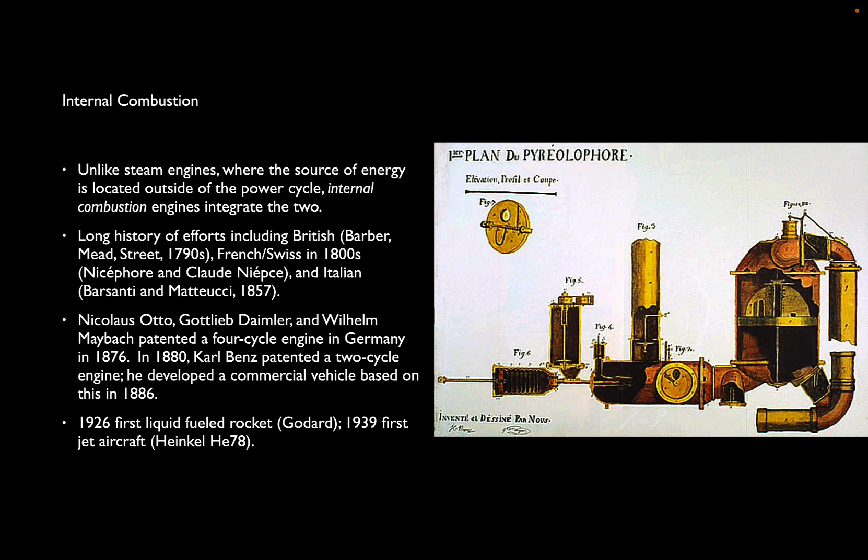This goes back to the 1790s or so in Great Britain, and throughout the early 19th century, there are efforts to create better and better engines, better power sources. In the 1860s and 1870s, a series of experiments in Germany, particularly by Otto, Daimler, and Maybach, start to produce workable internal combustion engines that can be mounted to smaller and smaller vehicles.

There have been efforts to put steam engines onto what had formerly been horse carts. Those are ungainly. They require an awful lot of effort to tend the fire. The internal combustion engine seems to offer a better way to do this, in that it can be self-contained. The driver doesn't have to worry about stoking the fire.

By 1886, Karl Benz has produced vehicles like the replica you see here, a commercially viable three-wheeled cart in this case that has a small internal combustion motor on the back that drives the wheels and allows it to move. There are other internal combustion technologies, some of which we'll look at a little bit later.

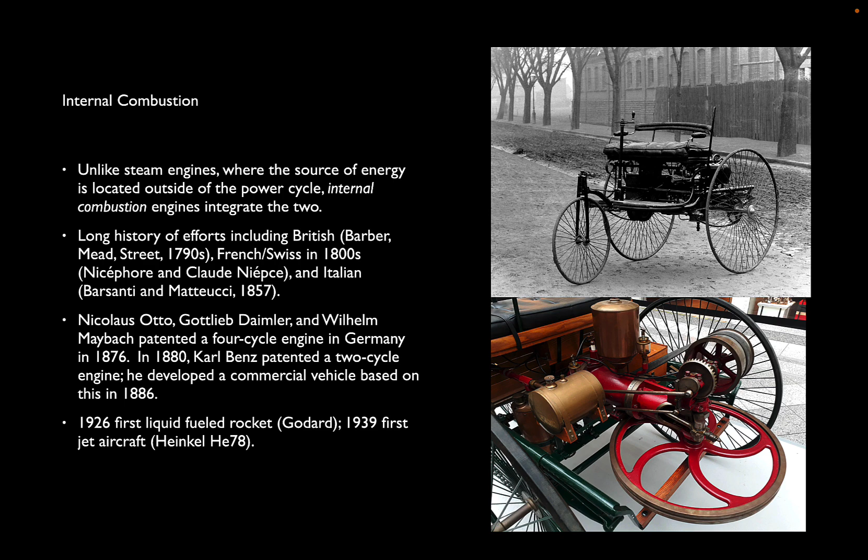Rocketry is internal combustion. Goddard in the United States pioneers that in 1926. And aircraft, both first internal combustion piston engine aircraft, but by 1939 the first jets are being used or experimented with in Germany. So the first thing I want to look at is how building responds to the popularity of internal combustion.

Benz and later Daimler and Maybach, and then eventually Studebaker and Ford in the United States, pioneer the commercial production of automobiles with internal combustion engines attached. They're complicated machines. They require a good deal of standardization and a good deal of assembly. One of the first ways that architecture or building responds to this new technology is by providing buildings that actually allow for the manufacture of these machines, of the engines and of the cars.

And there's a kind of one-to-one link between some of the building technologies that we've looked at and the automotive technologies that are coming off of the assembly line.

Kahn took a very standardized, Taylorized approach. He was a big believer in scientific management. Among his other achievements was the way his office was structured, very much like offices would be throughout the 20th century. Kahn was an early pioneer in this kind of brigade system of office hierarchy.

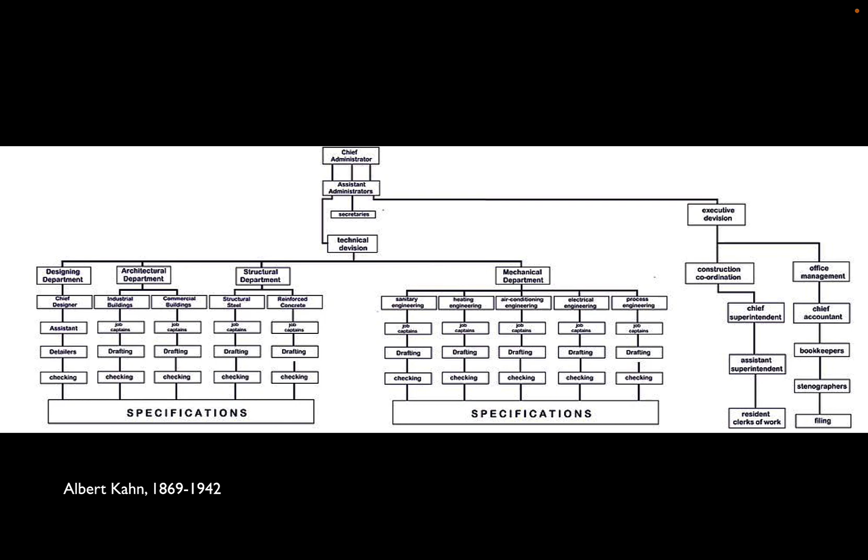Each complex project would get broken out into structural, mechanical, architectural, and what he called design, all reporting to a series of heads who would then report to administrators within the firm. There was also a division for running the office and coordinating construction. Kahn and his brother Julius Kahn were not only architects and engineers, but also inventors.

Julius in particular pioneered a type of reinforcing bar, and we've seen lots of patents for reinforcing bars. This is the so-called Kahn bar on the upper left. They developed a company that Julius runs, which ends up becoming independent of the architecture firm, called Truscon.

They produce the materials that go into a lot of the factory buildings, especially those the Albert Kahn firm designs. The Kahn bar combines shear reinforcement with tensile reinforcement, so Kahn sells it as a way to turn a reinforced concrete slab or beam into a truss with some of the same efficiencies.

But Kahn does other things as well. They pioneer the use of lightweight metal arches to provide for jack arch construction, but this time out of concrete instead of brick. So these are some of the early pure concrete floors following on from the experiments Ransom does. You can see one of those on the lower left.

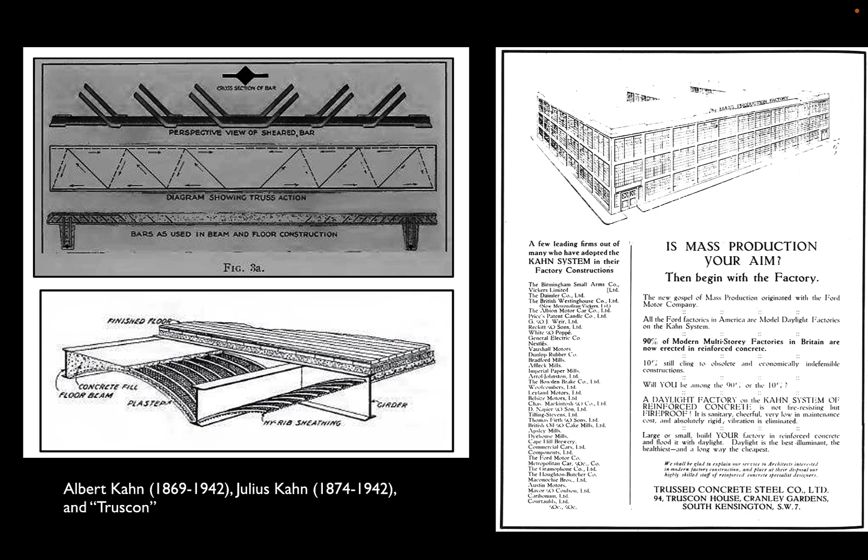They also take ideas from Hennebique and from Ransom, turning their design and engineering expertise into a system. On the right, you see an advertisement for the Kahn system of factory construction being advertised in Great Britain. If you look at the address, this is a franchise approach, very similar to Hennebique's - design expertise, engineering expertise, construction expertise, and patented systems licensed for the construction the Kahn brothers provide their clients.

Kahn did not suffer fools, and in addition to all of this invention, the principles of scientific management led to a culture of what today we might call integrated design. As you can see from the quote, Kahn didn't believe in the genius architect myth. If you went to work for his firm, you were there to be part of a team and play your role in getting the job done - little encouragement to the temperamental in our men, and this lessens our problems. You can imagine the sort of culture of the firm.

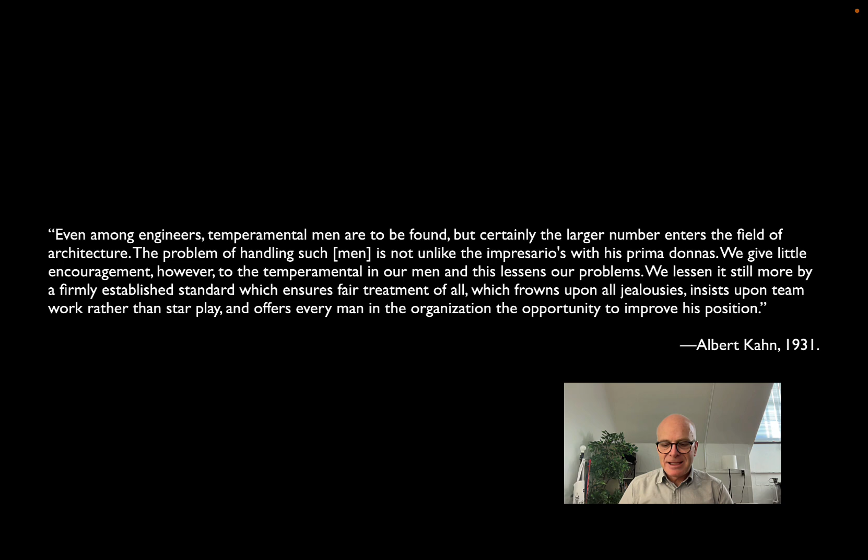This idea also translated into the architecture - the factories Kahn's firm did always took a back seat to the logic of production. Kahn's firm did lots of much fancier buildings, museums throughout Detroit, office buildings in Detroit, and many buildings on the campus of the University of Michigan. They were all very competent, well done Beaux-Arts buildings. But his factory buildings really were machine-oriented.

You can see from this early work for the Packard car company in Detroit that it borrows a lot from Ransom's early factory construction - a concrete frame infilled with just enough sill to keep people from falling out, very large windows to bring in as much daylight as possible, standard modules so machinery being put in can be moved around relatively easily, and a system using his brother Julius's techniques and patents allowing for skinnier slabs, thinner beams, thinner columns, and more efficient construction.

The Kahn firms, Albert Kahn and Associates, and then Truscon, get a reputation in the industry for being the kind of industry architects for manufacturing buildings, mostly for automobiles.

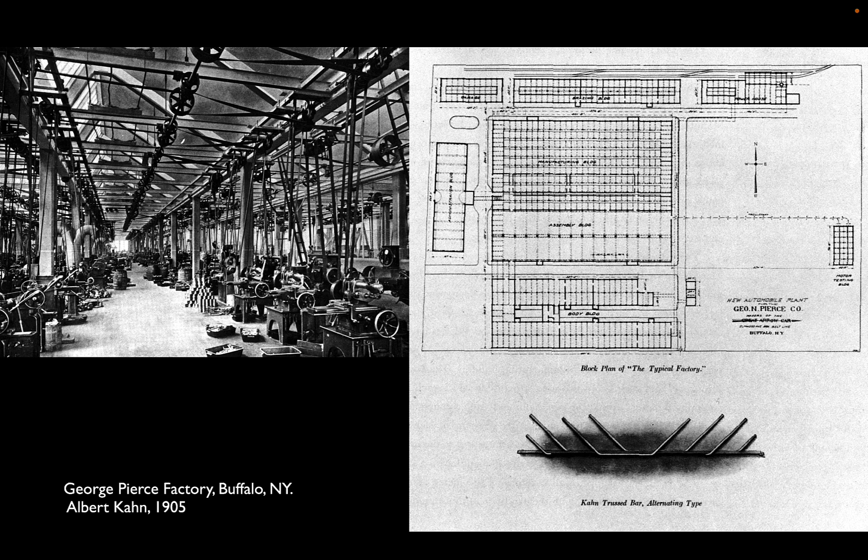This is a sort of early factory floor. It's not quite what we would call an assembly line yet. That really comes with the Ford Company's Highland Park plant, built just outside Detroit in 1909.

This is a collaboration between Henry Ford, who has this vision of the standardized automobile, the result of hundreds and hundreds of repetitive tasks with elements that are exactly the same. There's no handicraft here, no artisanal work. These are not stagecoaches or carriages, these are mass-produced machines. Ford's vision is for a factory where he can put people to work, each doing the same task over and over again—relatively unskilled labor, breaking a complicated task down into hundreds of little, not very complicated jobs.

Kahn's response is a concrete frame building, very much like his early work for Packard and for Pierce. You can see gigantic windows to bring in as much daylight, and as much fresh air as possible.

He also develops an idea about gravity-fed production. All of the hundreds of pieces that go into a Model T get taken up to the top floor, and as the automobile gets assembled, you get heavier and heavier pieces that they're able to drive down to the various floors. So the assembly line wraps back and forth, starting on the fourth floor and working its way down to the ground floor.

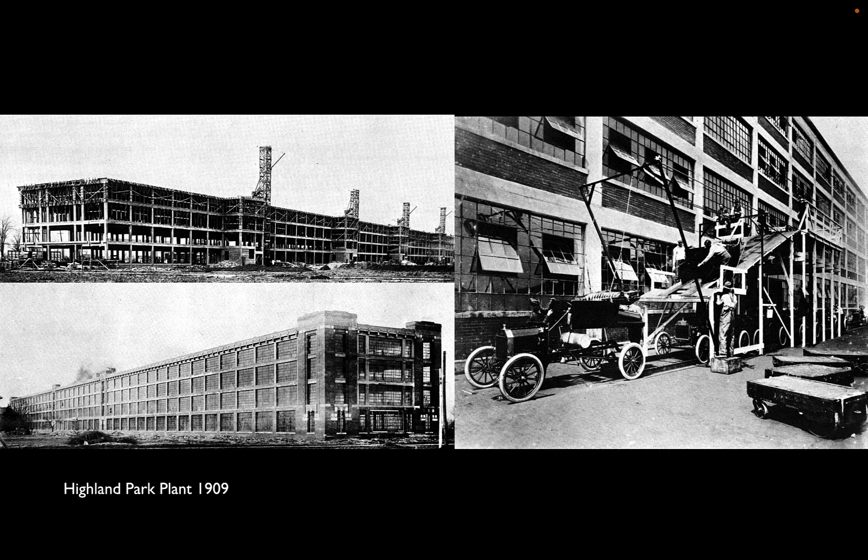There's an idea here about the architecture and the automobiles being similar in some ways—that it's almost a factory production that creates the concrete columns, the concrete slabs, and that in turn the standardization allows for the very efficient organization of an assembly line down below.

Ford we think of as famous, or notorious, for turning everything into the most efficient task possible. The only color you can get a Model T in is black, because black paint was not only easy to obtain, but it dried faster than any other color Ford could find. That saved time on the assembly line and allowed them to turn out these cars over and over again. Here you get a sense for the scale of production—brand new cars lined up outside the factory.

Around World War I, the gravity-fed practice that Kahn and Ford pioneered at Highland Park changes to a horizontal layout. With electric power, it's easier to move heavier pieces around, so you get overhead electric cranes and electrically run conveyor links that allow for a more spread out horizontal approach.

Concrete gets better, high-strength steel gets better, and this enables longer spans, which allows for larger machinery—the columns don't get in the way so much. Electrical lighting and structural advances, including roof monitors, mean the machinery can be positioned according to whatever the organization requires. They don't have to be near windows even if they require fine vision tasks; they can be put anywhere on the factory floor.

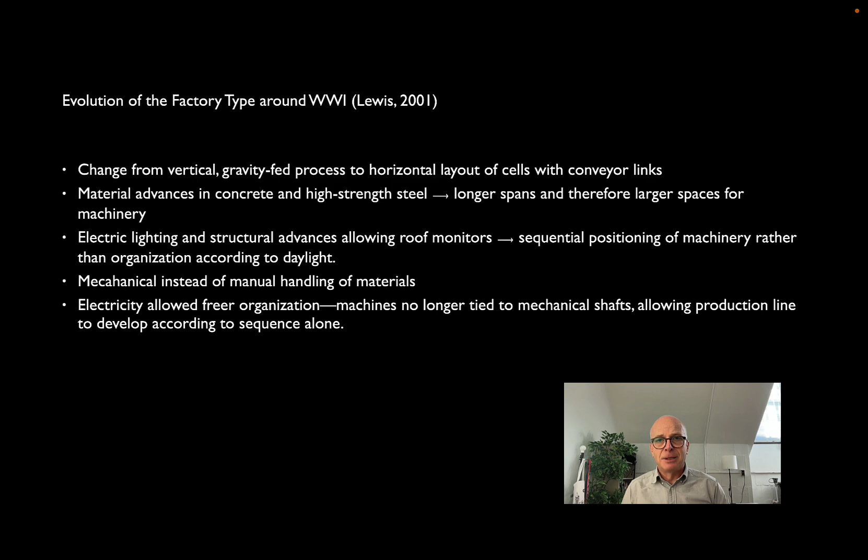Kahn's work for the automotive industry follows suit, and you start to see more articulated, more efficient, more dedicated structures that respond better to the way these assembly lines are developing.

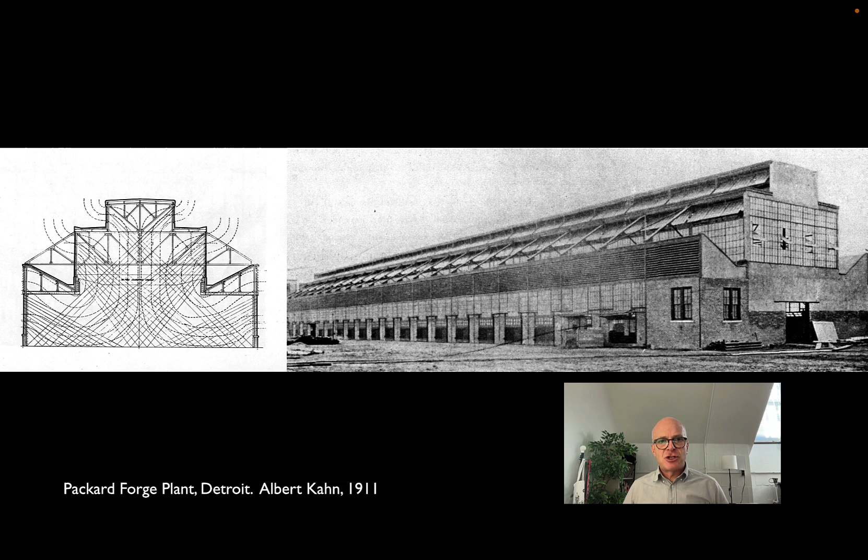This building for a forge, a very hot process in Detroit for Packard, shows that Kahn is able to use steel to produce shapes with a lot of natural ventilation that take the extra heat from the forges and discharge it through upper story windows. The section also brings in a ton of natural daylight at all levels and allows for fine-grained opening and closing of windows, keeping the space, if not comfortable, at least relatively cool.

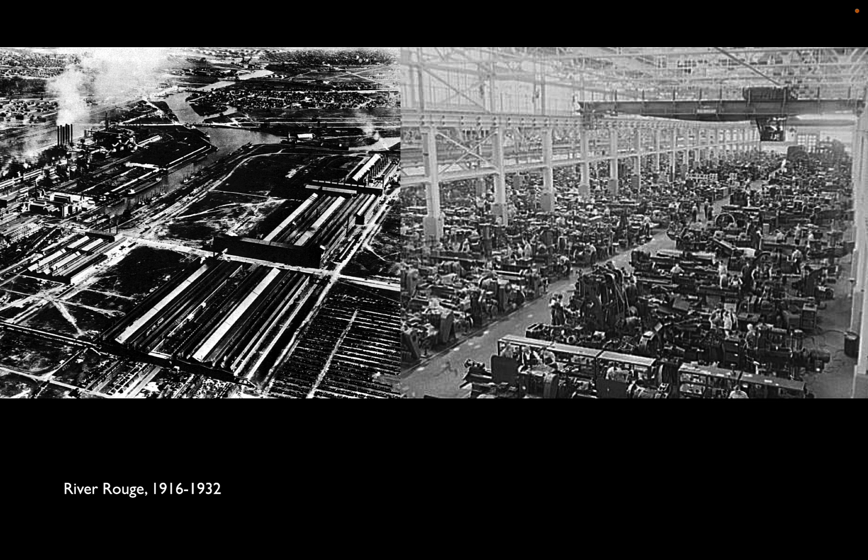The greatest example of Kahn and Ford working together to produce the buildings that would manufacture internal combustion automobiles is the complex at River Rouge, just south of Detroit, which would become Ford's main production plant by the 1930s.

You get a sense for the scale here with the overall site on the left. You can see that in the upper left there are the generating buildings. The smokestacks are where the generators use coal to produce power in the form of electricity.

There's a slip off of Detroit's main river, and there are rail links to the south, east, and west. All of the raw materials come in from the river and the eastern rail links, and everything tracks through. Things get put together in these various buildings, and at the end, on the west side, you get finished cars. Compare this in scale to the Highland Park plant—the automobile has gotten much more popular and the market bigger, but the process has also gotten more elaborate and spread out thanks to electricity. You see an electric overhead crane in the shot on the right, and it's more effective because the factory floor can be laid out horizontally.

As you can see, there is light coming in both from upper monitors that use high-strength steel to achieve these big spans, but also from electric lighting.

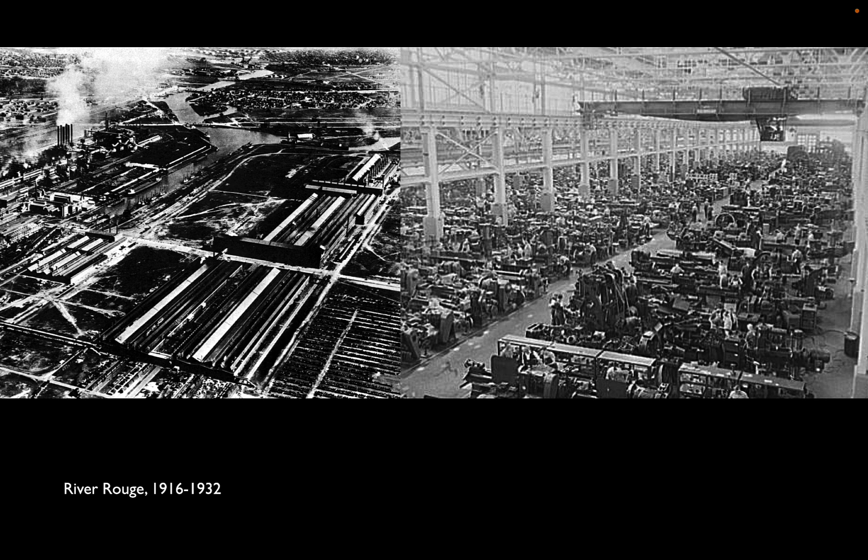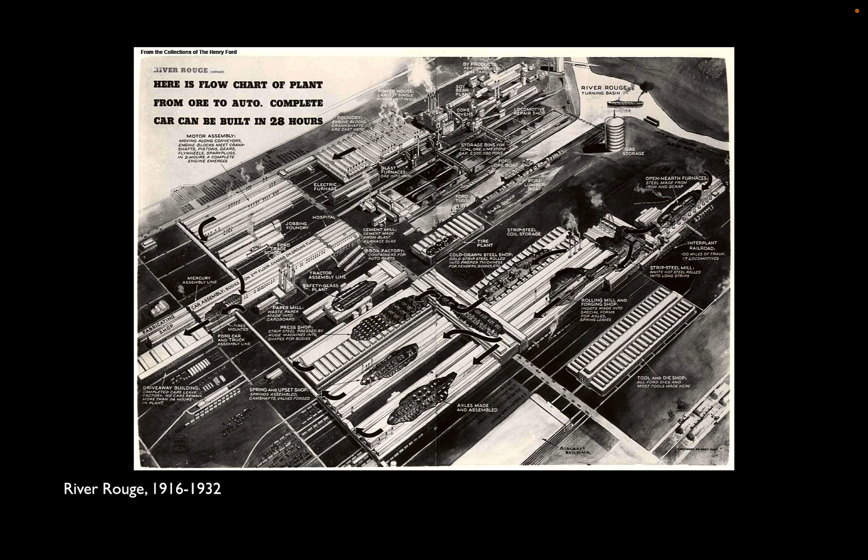You can see raw materials coming in from the slip—there's a lumber boat, there's an iron ore boat. There are blast furnaces located next to the powerhouse, and both use coal to produce their heat. The raw ore gets turned into steel and iron in the foundries and furnaces on the upper right, and gradually things get more and more refined as they go down to the lower left. The arrows show you the flow chart for how this system works.

If you zoom in, you can see that the buildings themselves are aligned in ways that reflect the flow of materials through River Rouge. All of these shed roofs, long linear structures, and spread-out horizontal structures are designed to assist in the process. It's like one giant machine, or you could think of it in today's terms as one giant silicon chip design, where all of the materials are flowing through these buildings that Kahn has designed in the most efficient way possible.

You also get a sense for the standardization—as technology gets better or they need to replace machines, it's very easy to do because the buildings are all standardized. The structural spans are the same in each building so that you can move pieces around relatively easily.

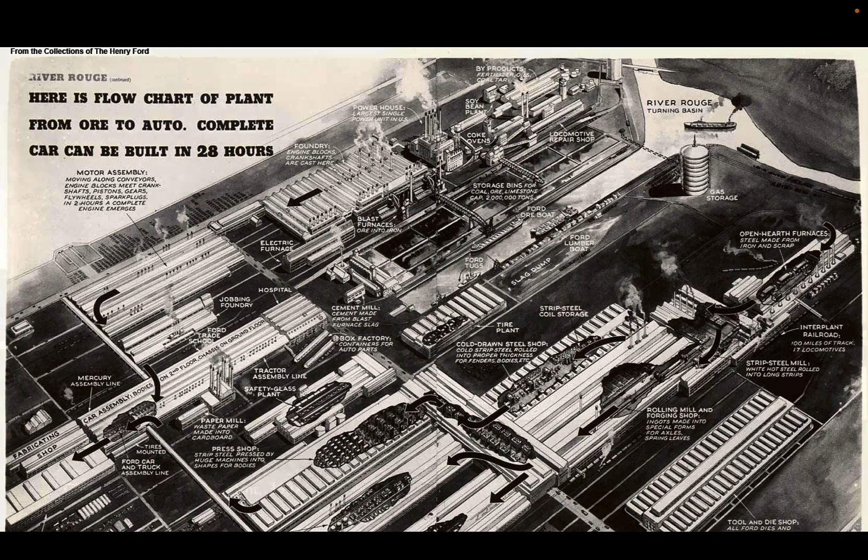Over time, Kahn's work for Ford gets more structurally sophisticated, and his work for other companies shows they're clearly learning what the materials they're using are capable of. High-strength steel in the form of trusses goes toward more and more efficient structures.

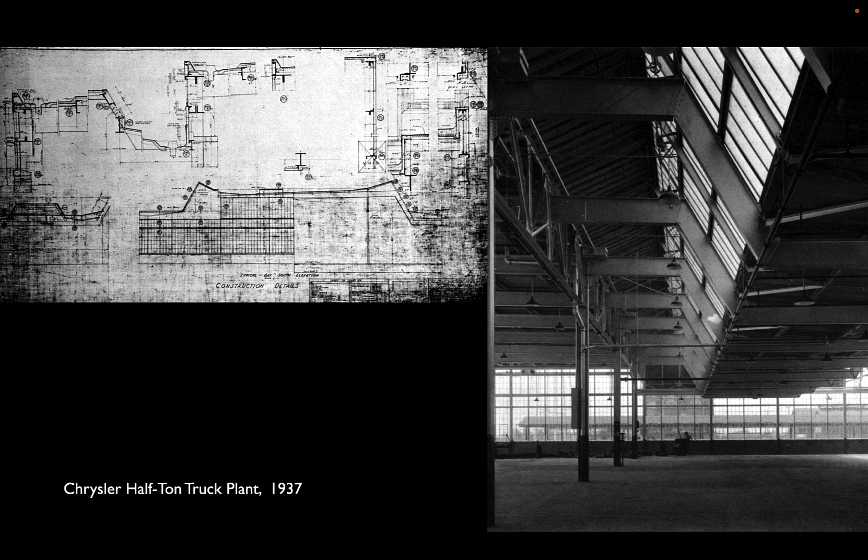Here, the half-ton truck plant that the Kahn firm does in 1937 uses riveted and welded connections to achieve these monitors that bring daylight into the center of the space. You can get a sense here for the efficiency that steel brings to the process—it is much finer, and the columns are much thinner than the concrete that Ford had been using in the early part of the 20th century.

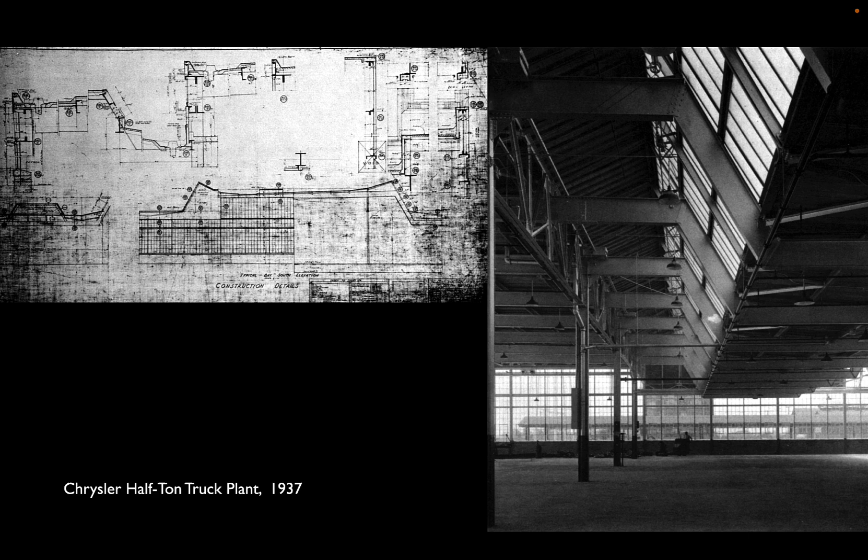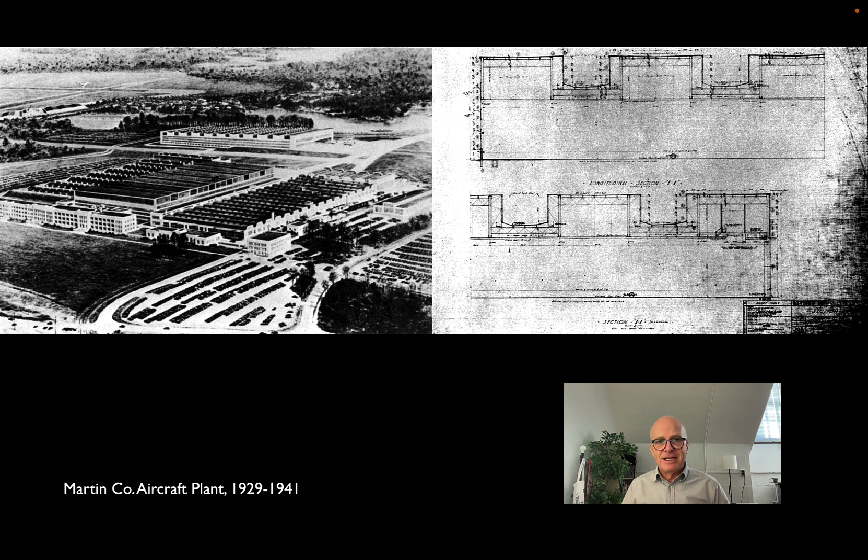You can see on the right, this drawing from Kahn's office shows again that steel is being used to bring daylight into the center of this vast open floor. And here you get a sense for both the scale of the operation, right?

The planes, of course, are much larger than cars. The wingspans require a lot more space to maneuver the finished products around. And everything that we've talked about in the last few lectures is here: the long span steel trusses, which enable open, clear span spaces of 100 or 200 feet beneath them.

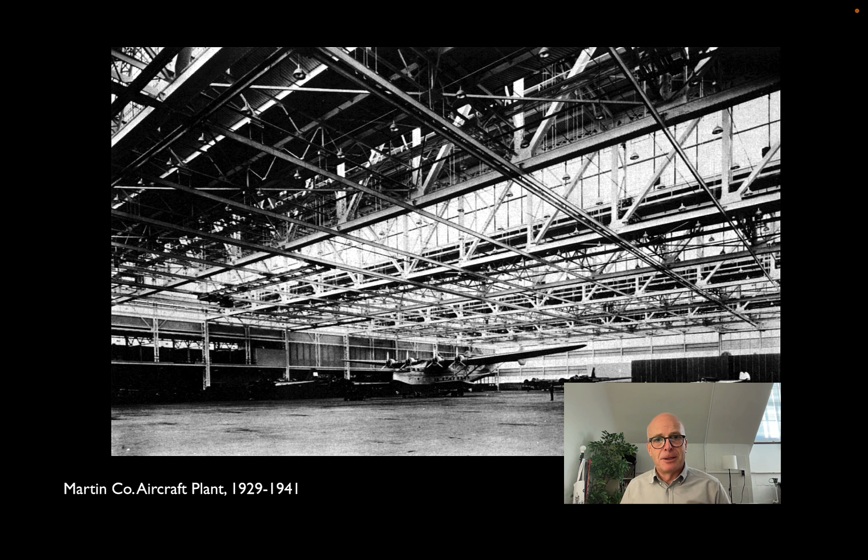You can see cables and conduits strung throughout the ceiling taking electric power to overhead cranes and machinery on the floor. There's electric light working in conjunction with the monitors, or the linear skylights. Those not only bring in daylight, but also allow air to be exhausted off the floor.

This is not only an efficient factory, it was also in the 20s and 30s one of many factories that inspired architects to think about the possibility of a new architectural language, a new industrial language. The romance of architecture as a machine was captured by a lot of designers. Corbusier, of course, most famously said that the house is a machine for living in. But his contemporaries also looked at examples like this and found inspiration.

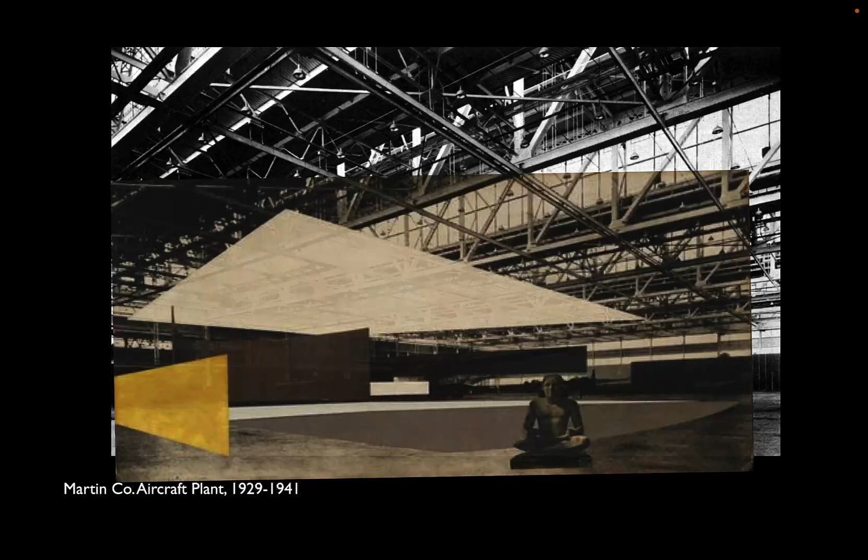When Mies van der Rohe enters a competition for a concert hall, he sees the Martin Company plant as a kind of ready-made. His entry for that competition literally takes the background of the Martin plant, collages over the plane, although you can see they are actually still in the background of his collage. He basically says this is a way of creating universal space, and it's architecturally acceptable. All we have to do is hang a ceiling, a couple of walls, put in a sculpture to indicate that this is some sort of cultural facility.

And we can use the kind of ready-made industrial architecture that firms like Albert Kahn are producing as an inspiration for the cultural buildings that are going to come in the 20th century.

Whether you quite buy into that or not, the war effort for World War II really jumpstarts factory construction. Kahn's firm is one of the leading firms to produce the buildings that now are not going to produce cars, but are going to produce the kind of materiel for the American forces in World War II.

So here in 1941, as the world is heading to war, Kahn is commissioned to design a manufacturing plant at a small airport outside Detroit. This is a building to produce bombers. Kahn's factory has to use these very large spans to accommodate even larger wingspans on the planes they're building. You see those on the right-hand side.

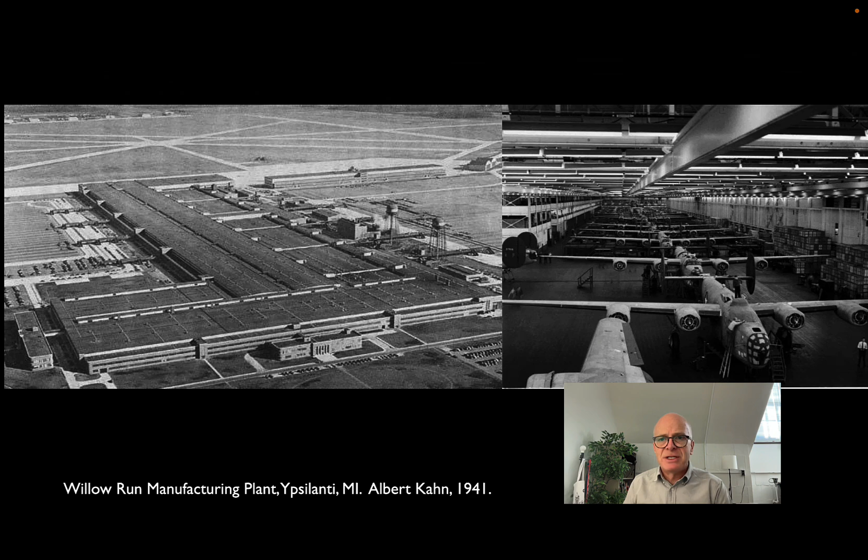It's not just the building, though. The Willow Run plant and a number of other large wartime factories rely on these principles of scientific management. Part of the Willow Run plant is a design office that's attached directly to the factory floor, with a staff of a couple hundred engineers and draftsmen working on the design of the aircraft.

So even as the planes are coming off the assembly line, there's a team of designers looking for ways to build them quicker, more effectively. They're taking on board suggestions or ideas as the planes move through the factory floor. That's really only possible with this kind of iterative process, the assembly line that produces the same thing over and over again.

In the next part of the lecture, we'll look not at architecture influenced by internal combustion in the automobile, but at engineering and construction that supports the automobile by providing the network of roads that countries need to make the most use of them, both economically and in terms of leisure travel or commuting. Road and bridge construction is probably one of the greatest stories of 20th century building, and we'll look at how the automobile both inspires it and provides new challenges for builders in the early to mid 20th century.